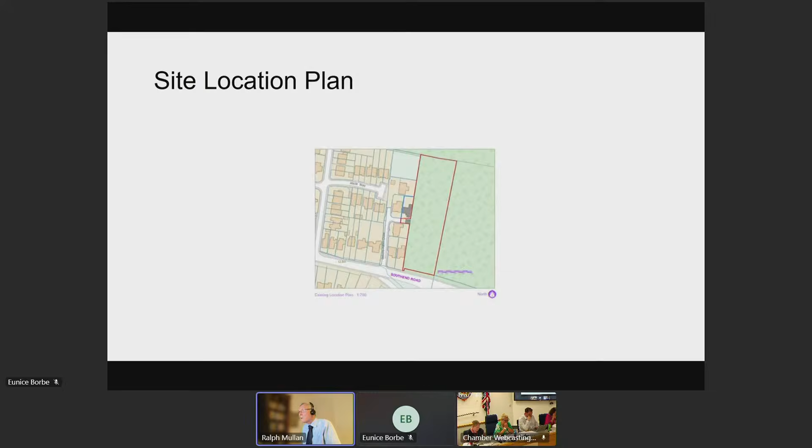I'll move on to the next slide. This application site adjoins our application site, and it was granted planning permission for 250 homes in November of last year, a development by Martin Grant Homes. It directly adjoins the current application site on the north and on the east.

Again this is the layout, and as you can see it's a development of 20 houses, all of them affordable. 14 will be social rented and 6 will be intermediate. It's a mix of 10 2-bedroom and 10 3-bedroom houses.

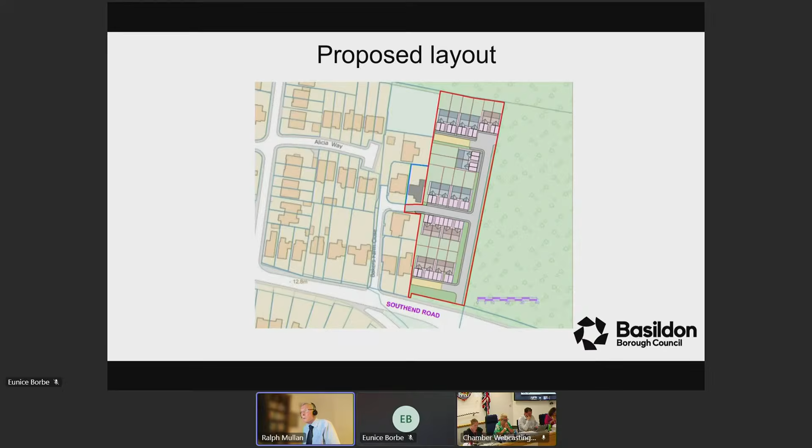As part of the application, the applicant has submitted access improvements to Bakers Farm Close. These include visibility splays at the front of the site, an improvement to visibility at the turn in Bakers Farm Close itself, the access itself which will involve demolition of the garage at number 5 into the application site giving access, and a pedestrian link at the south of the application site to the footpath.

I'll move on to the key issues. The key issues concern the Greenbelt location of the site. Because it's a vacant site, none of the normal exceptions set out in the NPPF apply here, so it should be regarded as inappropriate development in the Greenbelt. However, recent changes to the NPPF do allow housing developments in the Greenbelt to be regarded as not inappropriate if they meet a number of criteria. These are mainly that the development is on Greybelt land, that it's a sustainable location, and that it addresses a recognized need.

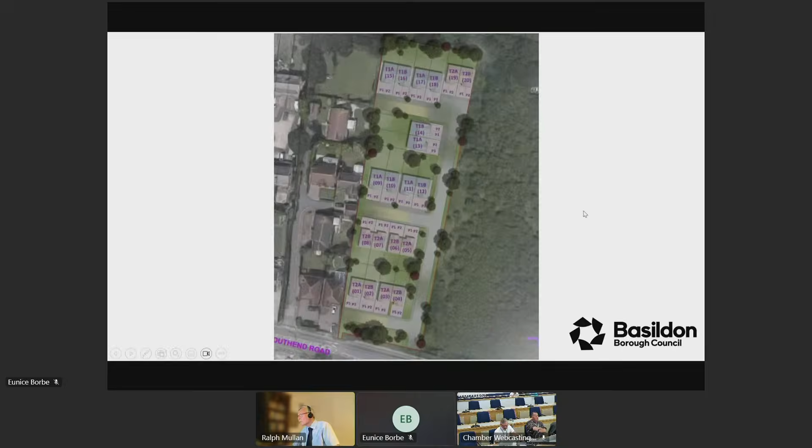Is that visible? No. Yeah, thank you, so it's on our screen now, Ralph. So the bit I wasn't sure about is there's a green arc. Yes, so if you're coming up Baker's Farm Close, that's it, and then turning into the site, there's a green arc with what looks like an arrow pointing, with a little bit of wording. Can you just explain what that is, please? Thank you. Yeah, that reads 11 meter forward visibility splay, in brackets, MFS standard for 10 miles per hour speeds.

So, Ralph, it's Mike again, just a quick follow-up question. You mentioned in the planning balance that the access arrangements would require careful treatment at the reserved matters stage. What exactly do you mean by that? Yes, well first of all this is an outline application, so this is an indicative scheme to show that access can be provided to the application site via Baker's Farm Close, meeting highway standards. When we look at it at reserve matters stage, when it comes in at reserve matters stage, this will be the baseline on which we will assess the matters further.

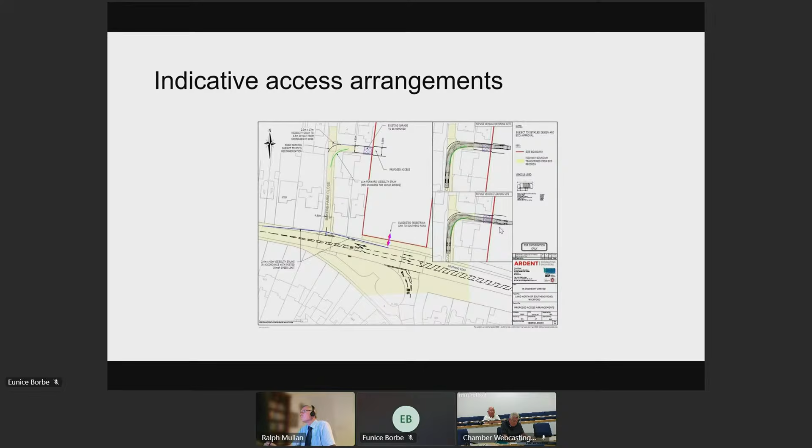Good evening, Chair and committee members. My name is Stephen Cook, and I'm speaking tonight on behalf of the long-standing residents of Bakers Farm Close in Shotgate. I've lived in this close for 26 years, and I'm here tonight to urge this committee to refuse this application on critical grounds of highway safety and severe loss of residential amenity. We're not just complaining about more cars; we are presenting undeniable, fixed physical dimensions that make this development impossible to access safely. Bakers Farm Close is a minor, highly restricted cul-de-sac. The vehicle road is exactly 3.5 metres wide, flanked by a single footpath of 1.5 metres.

First, the new layout fundamentally violates the Essex Design Guide 2018 edition, version 3. For a development of this size, the county standards mandate a combined pedestrian and vehicular surface of 6 metres, a target maximum driver speed of 20 miles an hour, a tabled entrance, and priority for pedestrians and cyclists across junctions.

Second, two-way traffic is physically impossible. According to the Department for Transport's Manual for Streets, section 7.2, the absolute minimum width required for two standard cars to pass each other is 4.1 metres. For a car to safely pass a delivery van or an emergency service appliance, a minimum width of 4.8 metres is required. Because our road is only 3.5 metres wide, vehicles will be forced to mount the narrow 1.5 metre footpath just to bypass oncoming cars. This places pedestrians, young children and elderly residents walking in our close in direct daily danger. This is a severe and direct breach of paragraphs 115 and 116 of the National Planning Policy Framework, which state that development should be refused where there is an unacceptable impact on highway safety.

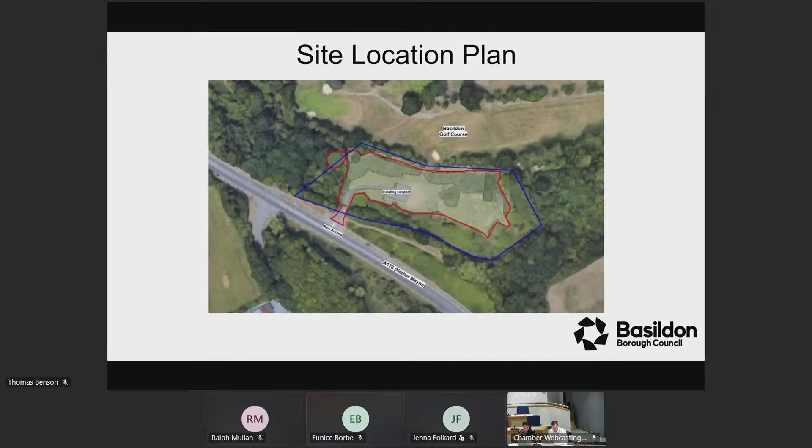The application site falls within an area of open space and within the Green Belt. The site is located on the north-eastern side of the A176, Nether Mayne in Basildon. The application seeks planning permission for the upgrade and replacement of the existing helicopter landing site for a new helicopter landing site. The existing helipad benefits from temporary planning permission, which runs until 2032. This shows an aerial view of the current site, and some existing site photos as well.

This shows the proposed site plan for the site. The proposed development would result in essential upgrades to the existing helipad, which is currently undersized and does not meet safety, operational and regulatory standards. The new helipad would be constructed to the east of the existing helipad - this is the new helipad, and this is the current site of the existing one. It would incorporate a 4 metre wide safety area, along with other operational safety features, including new lighting.

The existing helipad would be repurposed as an ambulance waiting area, and no changes are proposed to the existing access into the site. Whilst the development does not meet any of the Green Belt exceptions, essential upgrades to the helipad are considered to represent very special circumstances. The application is accompanied by noise impact and light impact assessments, and the Council's Environmental Health Service have raised no objections to the proposed development. No objections have also been raised by residents regarding the proposed development.

Let's just run through some of the key issues, infrastructure, and then planning balance. In conclusion, the application is recommended to members for approval, subject to securing planning obligations set out in section 6.9 and the conditions set out in section 7 of the report, along with the amended condition on the update sheet. Thank you, Thomas.

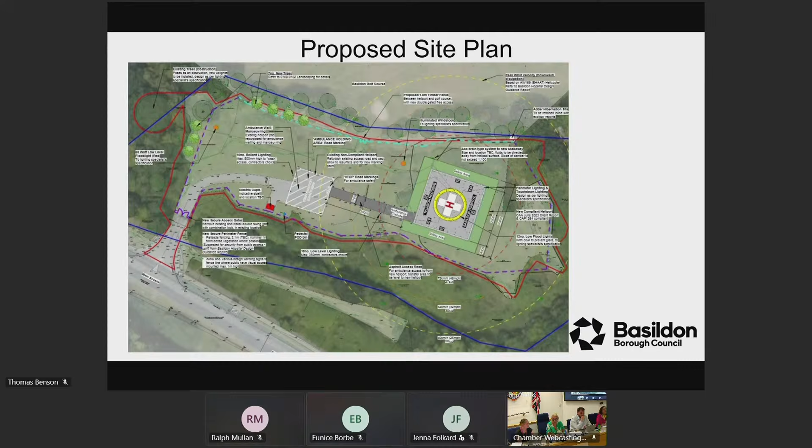Sorry, it's part of like the golf course around near there, so it's not an area that's got a lot of properties around. So I think we need this. As Adele said, it's a different model now, so it's got different aspects, so it needs a bigger heliport. So, you know, I can't see any reason really why we would want to refuse it. It's only good for us. Thank you.

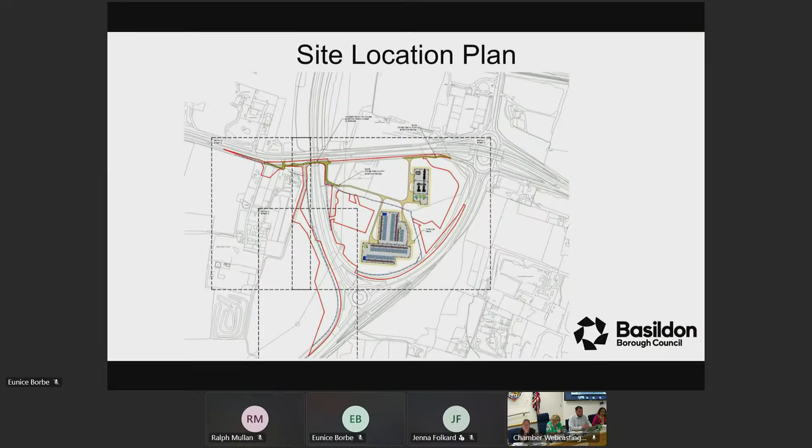The 2025 Greenbelt study assesses sites at a larger scale, so that's where it's done that assessment. But in this instance, the officer has assessed this individual site, and it is highly constrained. The assessment of this individual site has determined that it's strongly likely to be Greybelt, whereas the broader parcel in its entirety contributes to Greenbelt, if that makes sense.

And in regards to the demonstrable need, obviously paragraph 155 requires that there needs to be a demonstrable unmet need for this type of development proposed. What specific evidence has been presented that this battery storage facility must be located on this Greenbelt site rather than non-Greenbelt land elsewhere? I just want to understand really if this is a site-specific plan or just a generic argument about net zero.

The battery storage facility needs to be located close to suitable grid infrastructure to operate efficiently. The site is adjacent to major electricity infrastructure and transport corridors, so it makes it an appropriate location from a technical and planning perspective.

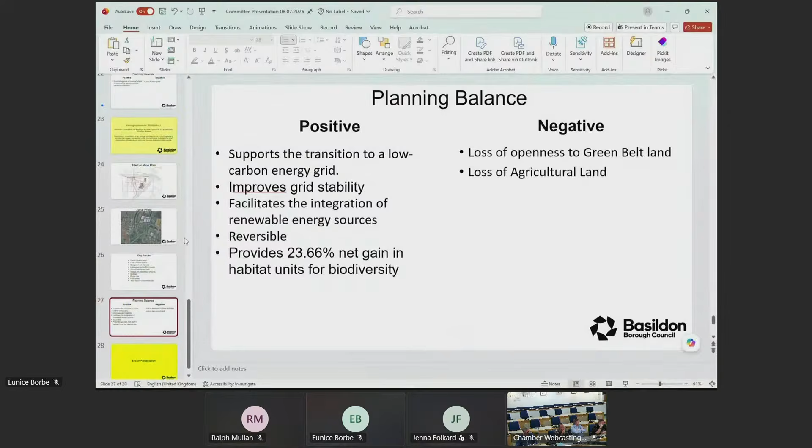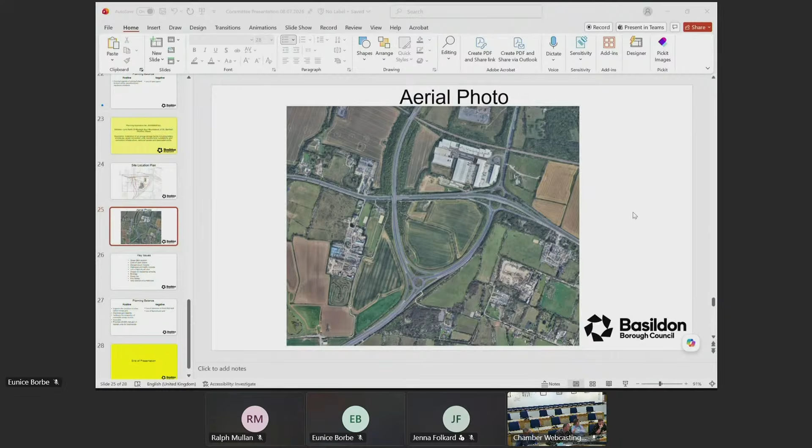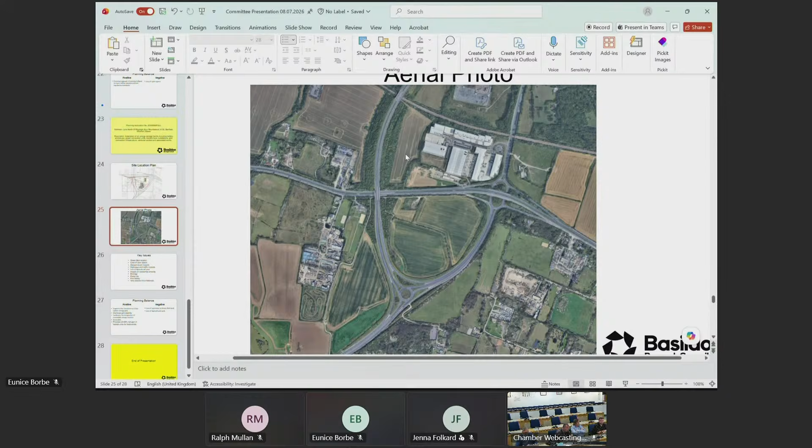I noticed that Essex Police have got no issue with this. That road, the whole circle around where we're going to put this thing - what protection is there going to be for those battery storage places? Because the A130 and the A127 do not have a good track record for serious road traffic collisions and fatalities. I've got the stats here - a fatal and three serious road traffic collisions over the last couple of years, and it gets even worse further back. So what's going to protect those battery storage plants should something happen down there - a lorry or cars leaving the road and going into the battery storage?

Is there any sort of infrastructure going in around there? I know it's probably not relevant to the application, but I'm concerned because of the history down that road, that whole section. Can I clarify with you? Highways don't appear to have any objections there, and yet the statistics show that area has a high proportion of killed, seriously injured and injured road traffic collisions. I'm looking at it here.

So what protection is there going to be for these battery storage units? Should something happen down there, a lorry or heavy goods vehicle leave that road and go into a battery storage shed and rupture something? The facility itself is not too close to any of the major roads, and as part of the associated infrastructure they have fencing. So they will be enclosed within that fencing, along with CCTV cameras. So on the road area, we're not suggesting they'll run some Armco or something like that around it.

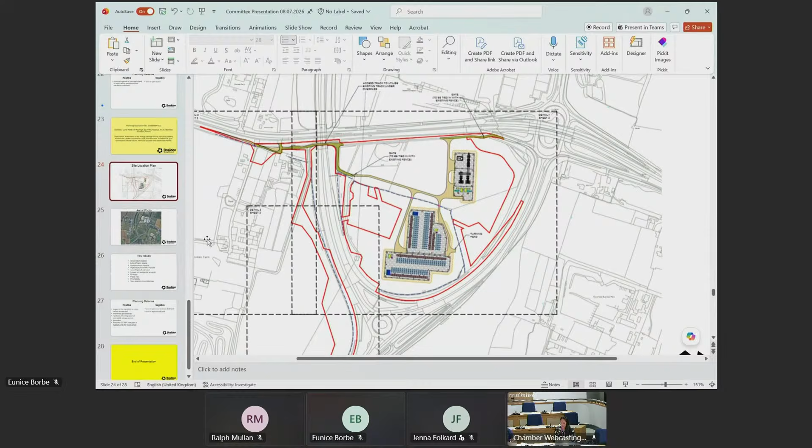Yeah, so the scheme will be connecting to the grid after 2030, and the substation it will connect to is Rayleigh substation, which is directly to the north here. You can see it a little bit better in this image. The site is where my cursor is here, and the Rayleigh substation is to the north of that. There's also an existing pylon there that is proposed to facilitate that connection.

Can I just clarify, really what you were saying is the grid stability - that's what it needs, because none of us want power cuts. We want something that was there to back it up if we need it. And that's what you're actually saying, isn't it? Yes, that's correct. Thank you.

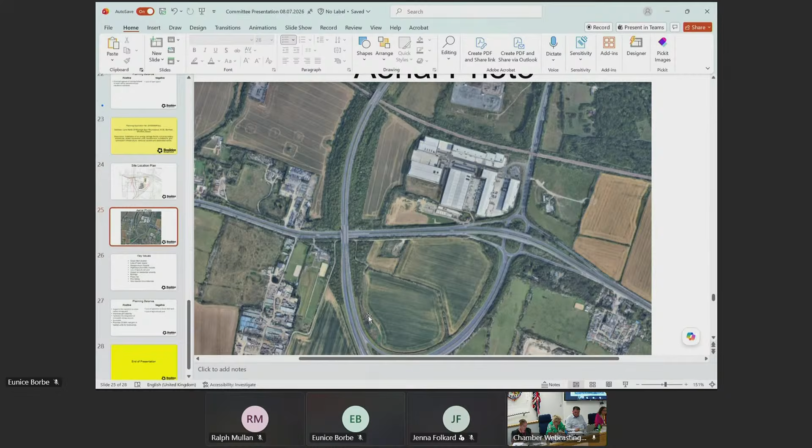We have one speaker that's remote. I think she's that speaker there. Hi, can you hear me okay? Yes, we can hear you.

Thanks, Jenna. There's a bit of an echo, so this might be slightly awkward, but I'll try to do my best. Good evening. If you could tone it down a little bit, it is very loud. Thank you, is that any better? Okay, I'll start. Yes, please. Okay, yes, thank you, and good evening.

Good evening everyone. My name is Jenna Folkard and I'm a project manager at RES working on the Fairglen Battery Energy Storage project. I'd like to talk a little on why a development of this nature should be supported. First, this is critical national infrastructure situated close to where it's needed. Our national grid is under pressure as the way in which we generate and use electricity is significantly changing.

At any given moment, the amount of energy we generate must be finely balanced with the amount of energy we consume. If this balance isn't achieved, it can lead to outages and grid failures. The grid needs to respond in milliseconds, not minutes, to prevent this downtime and keep the lights on for homes and businesses across Basildon, Essex and the wider UK.

Battery Energy Storage Systems, or BESS projects, like this one before you tonight, does exactly that. It helps support the national grid by storing energy at times when generation exceeds demand and releasing that energy back to the national grid when demand exceeds generation. Battery storage is the fastest accepted technology for responding to sudden spikes in demand or abrupt losses of supply, which keeps the grid stable without waiting for slower generation assets to come online.